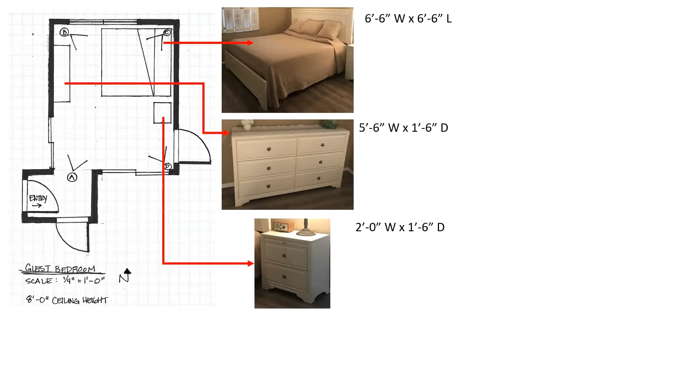So these are very simple boxes. You could certainly label these to be a nightstand if you wanted to, although I know based on context, a little table next to a bed is a nightstand, and usually a rectangular shaped dresser. If it's a rectangular shaped piece of furniture, and it's the only thing in the room, it's usually some kind of storage. But you're welcome to label mysterious rectangles if you like, or give enough context to the viewer by placing them in a location that the viewer can guess what they are.

In this video, I'm going to show you how to transfer the dimensions for your furniture pieces onto your floor plan. When I first started, I was actually drawing this piece of furniture here 2 feet or 2 boxes from the back corner of the wall, realizing that it was 5.5 feet long.

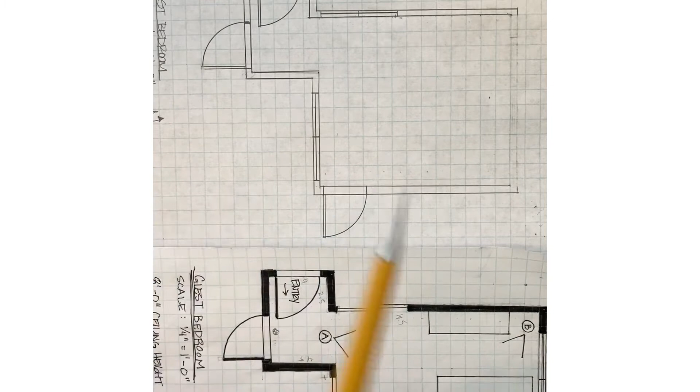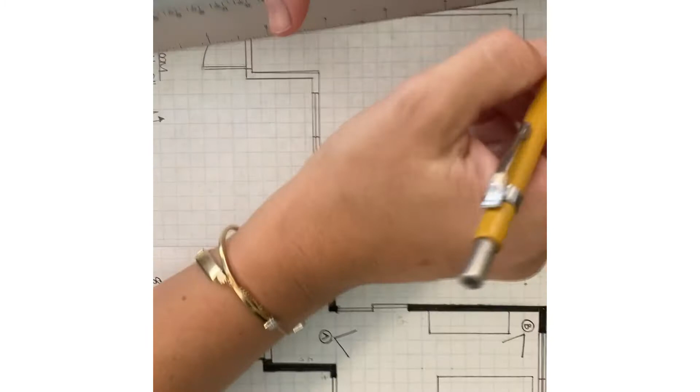And it came too close to this door here. It didn't look like my measurements. And when I counted, I realized I was 1 box short on this side. No problem at all, easy. All I'm going to do is just move it all up 1 foot, and then I'm going to erase really well. And then when I cover this up with pen, you won't even know it's there. Just be aware that sometimes when furniture doesn't fit in the space—you just made a mistake measuring, and all you have to do is redraw it.

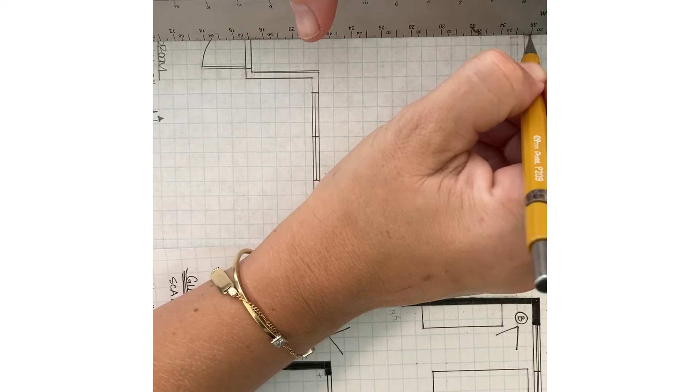I always say, it's always quicker the second time. See how fast? No problem. Okay, line in the middle. Okay, there's my windows.

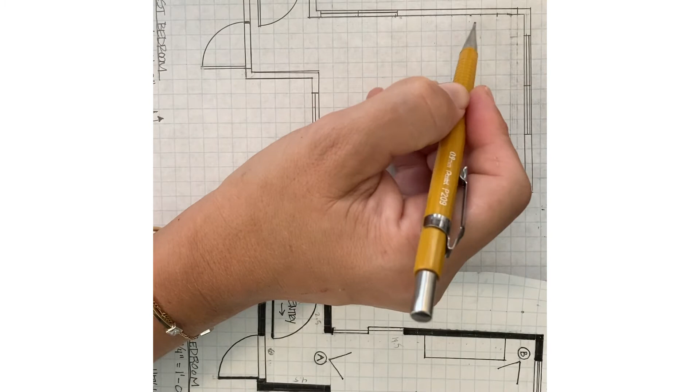Okay, now we're ready for this piece of furniture. So it's 2 feet from the back corner, and it's 5.5 feet long. So 1, 2, 3, 4, 5, and 5.5. That's a little better.

So when we measured this piece of furniture, it was 1 foot 6 inches wide, or 1.5 feet, or 18 inches. So you can see here, I'm drawing 1.5 boxes thick.

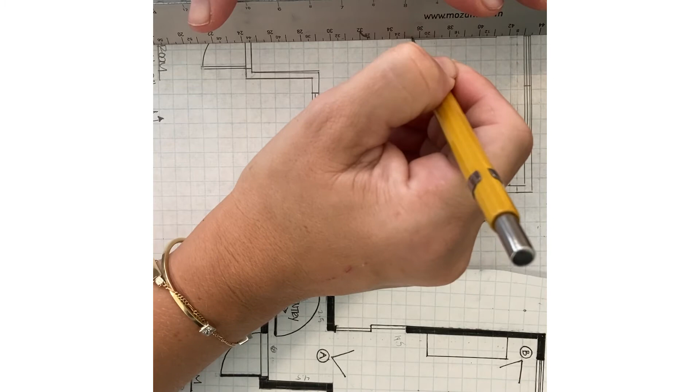Okay, and then of course we've got the king size bed. Those are huge. So 1, 2, 3, 4, 5, 6, 6.5 feet by 6.5 feet. So we'll go ahead and I'm going to pull it off the wall just a little bit. I'll start right here. 1, 2, 3, 4, 5, 6.5. Put a mark there. And then there's my half right here. 1, 2, 3, 4, 5, 6.

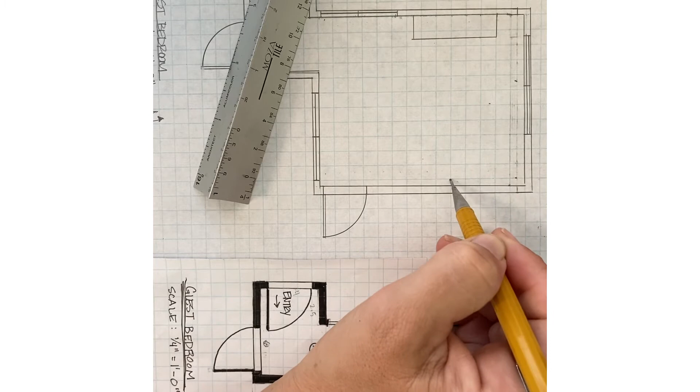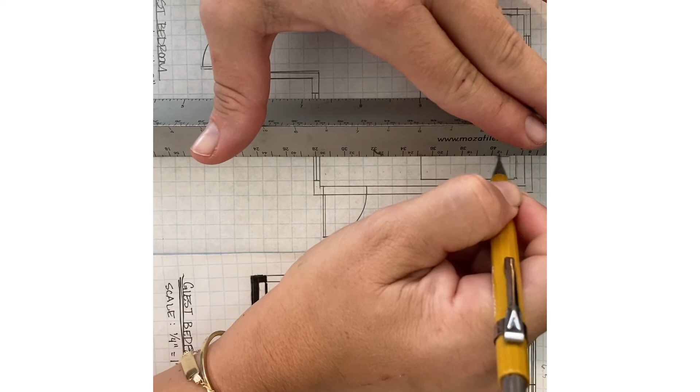And then I do my pillows. Okay, and that's how your viewer knows that this is a bed. You can do more details if you want, but at the very least, that's what you need.

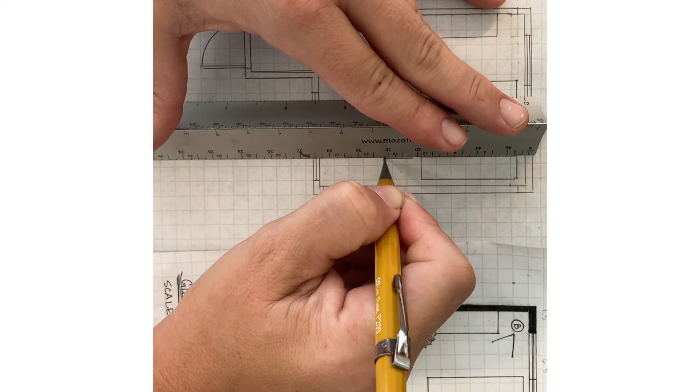Okay, and then we'll go ahead and draw the nightstand, which was 2 feet wide by 18 inches deep.

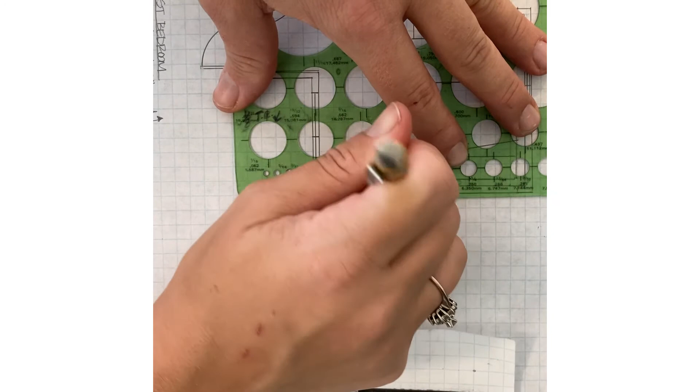Okay, so if you want, I'll teach you something a little extra here. If you want to add lamps, all you have to do is bring your circle template in here like this, draw a little lamp, and then use your ruler to create an X inside. That just indicates that there's a lamp here, and it actually signals to the designer that there's an outlet somewhere around there too, which is helpful to know.

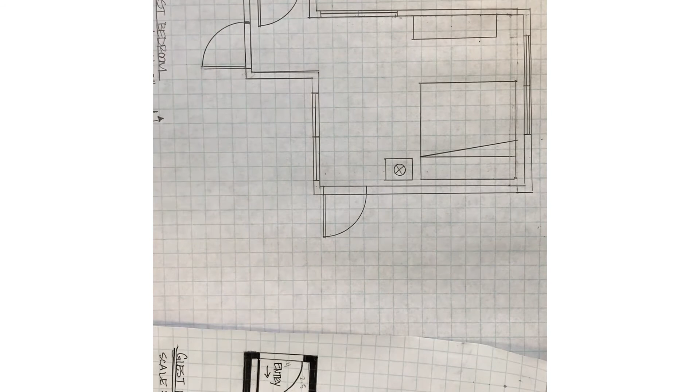Okay, so now we've got the furniture drawn in, the architectural features are drawn in, everything looks really, really good. And now it's time to trace.

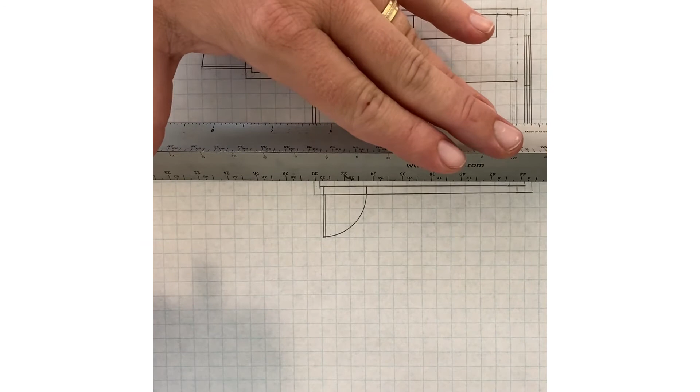So this can be a little nerve-wracking for the first time. A lot of times I recommend students make photocopies of this before they lay pen down, just in case you make a mistake. But again, the more you do this, the more you practice, the better you'll get. So if you make a mistake, just draw it again. So all I'm going to do here is just do it in a somewhat methodical way.

Okay, and now I can extend lines all the way down. You can see there's a little bit of bleed right there. That's what I want to try to avoid. I've got to pick up my pen a little sooner.

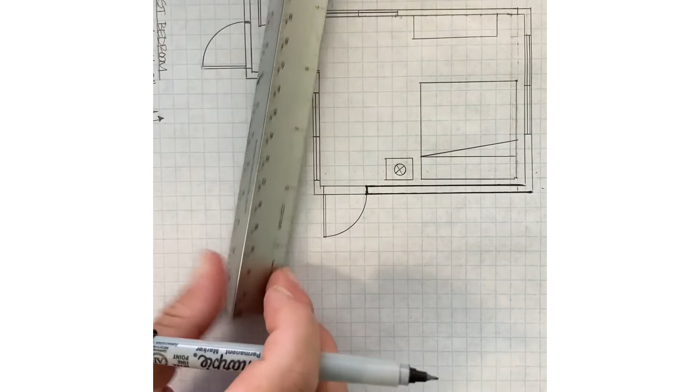And then it's really just going slow, taking deep breaths, relaxing, and trying to have a good time with this, because it can be fun if you don't take it too seriously. You just kind of try to relax your body while you're doing it.

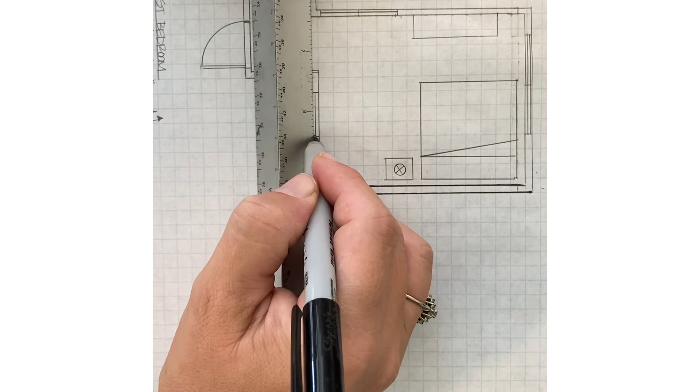Okay. And I always have a little bit of pause before I draw a line to make sure it needs to be there before I draw it. You can see here. Okay.

You may want a thinner pen. There's sets of Microns that come in all different thicknesses, and a thinner pen might work for you too.

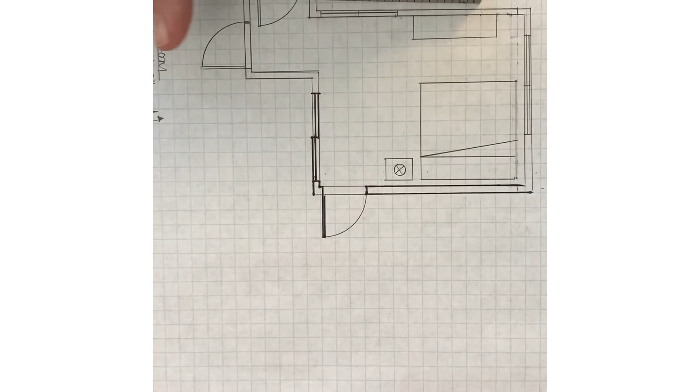Okay, so you can see I've got my doors drawn in. I'm not going to trace this whole thing on camera, but you can see here as I get these in, it's starting to define and look really nice and crisp.

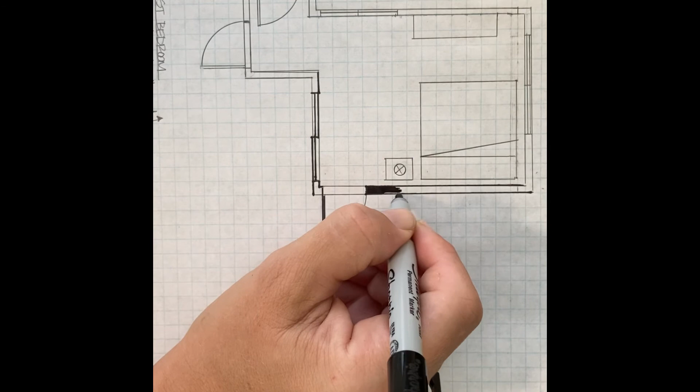And then you can use a thicker marker here to fill in the black if you want to, or you can use your pen here as long as you go really, really slowly. But the solid walls are supposed to be poché'd in - that's what we call filling things in with black. And the rest of these things, you can just draw real nice thin lines and fill in everything. You can also switch in between.

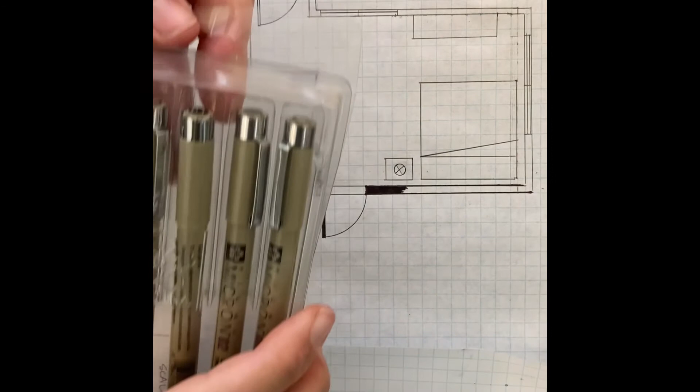And so you can see this is a set of microns, and you can see there's all different thicknesses. And if you really want to get nice thin lines here, you can see like on my windows - look, this is 0.005, so it's 0.2 millimeter thickness.

And so that's really nice to do these with. You kind of have to spin as you draw, but see, they're so thin. That's a level of craftsmanship if you want to get into, you're certainly welcome to. But at the very least, just trying to draw really thin lines the best you can, and certainly getting them crisp is the most important here.

Once you've got everything drawn, and its location, then all you have to do is take an eraser and just erase any extra lines here. It's real easy. See, you just go ahead over here like this.

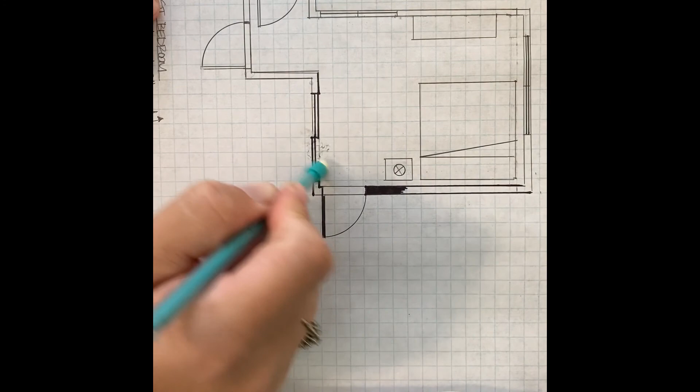Now, the handheld erasers - you know, the ones that are the big kind of white ones or pink ones - the pink ones will leave a little bit of residue, but those big white ones that are kind of no-mark erasers, those work nice too. Otherwise, something like that will work great.

And then once it's all traced in, all you have to do is get a really nice scan on a flatbed scanner or a really clear shot with your phone, and you're ready to go. And then you can also go ahead and add your camera views in.

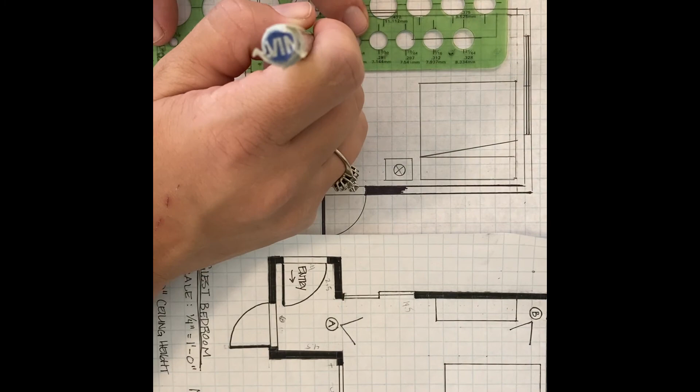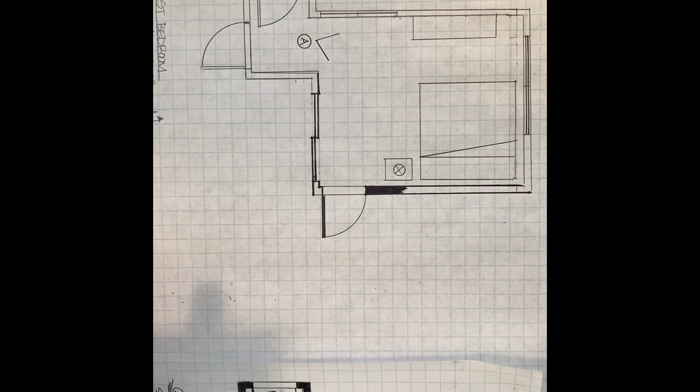So I'll go ahead and just show you. You just use a circle template. Okay, so you can do those all around and finish it up, and it's ready to go. But don't feel bad if it takes you a couple of traces to get these right on the first try. The more you do it, the better you'll get and the quicker you'll go.